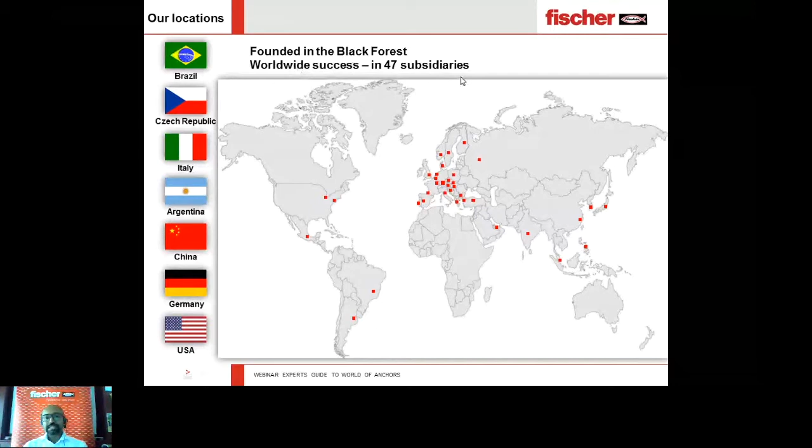And then we have different divisions. fischer innovative solutions of Fixing Systems is where I come from, and where we operate the webinar - it's all about fixings, anchors, supports, and so on. We also have a different division, which some of you might not be aware of: we are pioneers in the automotive industry as well, manufacturing main internal components for major automobile brands like Bentley, BMW, Mercedes, and so on.

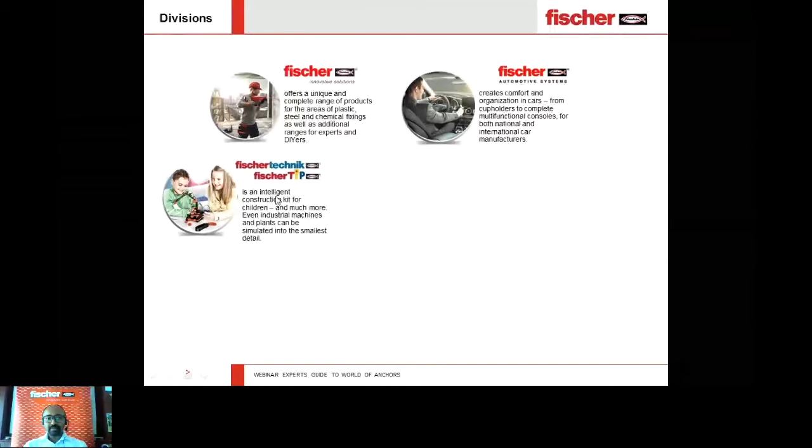Also, we have a very interesting division called fischertechnik. I personally love this division because these are smart, innovative toys for kids. And then fischer believes in lean process management by cutting down waste to operate more efficiently. So fischer has an in-house consulting division called fischer Consulting. We also acquired an automation division, which is basically into touch screens, capacitors, LCD screens and so on, which is also part of our world.

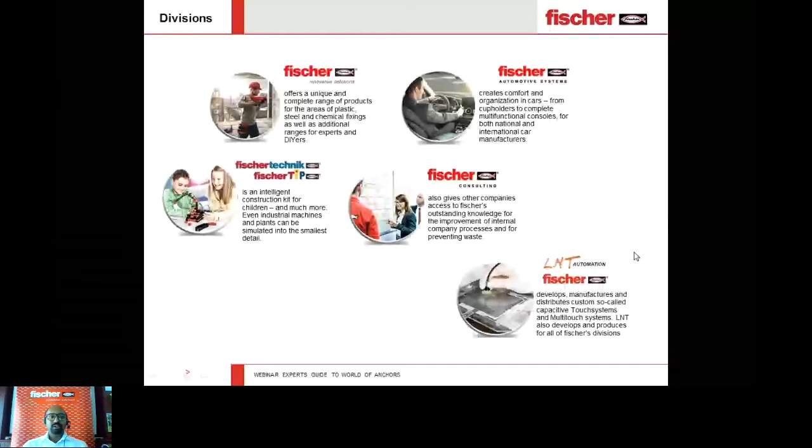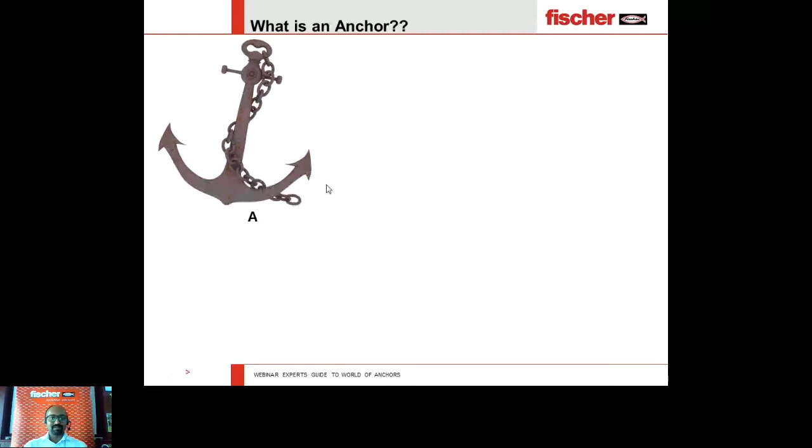Okay, now you want to be an expert in the field of anchors - that's why you attend the webinar, I guess. So let me ask, what is an anchor in your understanding? What do you think is an anchor? Let me give you some options - is it option A or is it option B?

What, in your opinion, is an anchor? Option A or option B? Okay, so you feel it's option A. Good. Okay, some of you say it's option B.

Okay, very good. Thank you, Mr. Michael. Thank you, Mohammed. Thank you, Hani, for being active participants. Some of you said A, some said B, some said both. So all of you are right. Both of these are anchors.

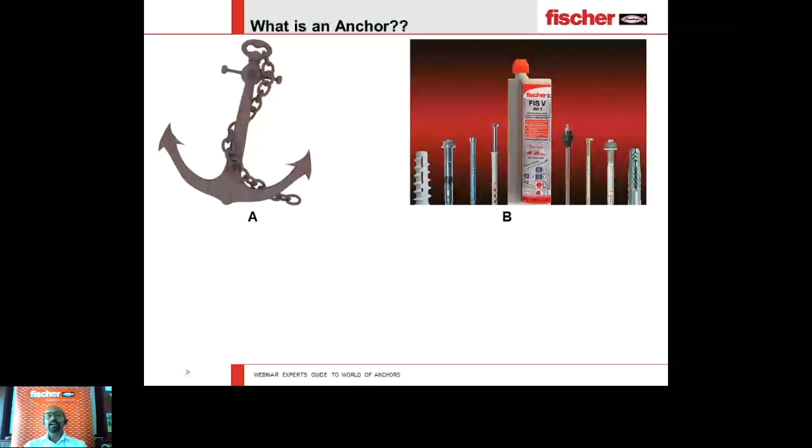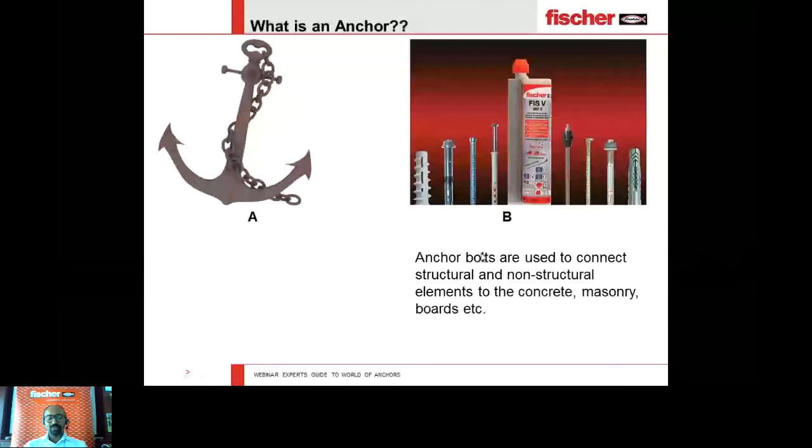One is used to anchor a ship, the other to fix something on concrete. So as you guessed, we are going to limit ourselves to option B. Option B means anchor bolts, which are used mainly to connect structural and non-structural elements to concrete, masonry, boards, etc. Thank you very much for being the sport, for actively participating.

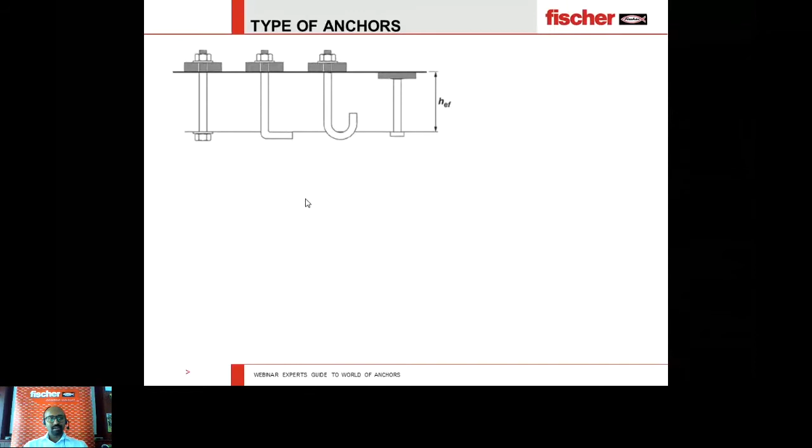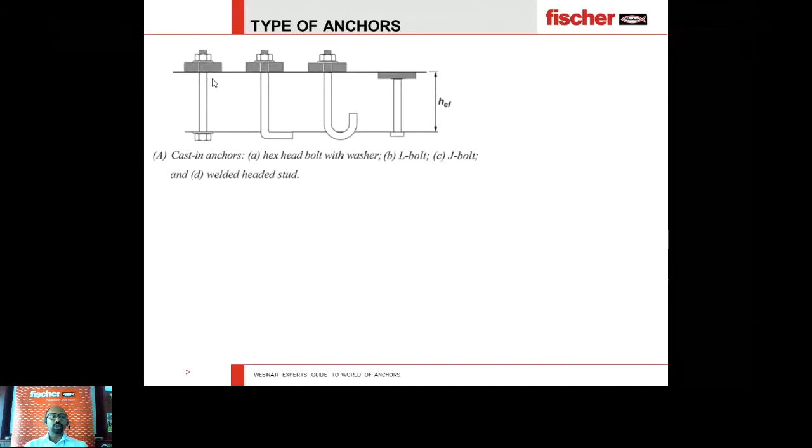Okay, it is popularly known as cast-in anchors, which are mainly cast before pouring of concrete, and then you have to wait for the concrete to completely cure before applying the load.

And then there is another type of anchor called anchor channels, wherein a channel with a bolt is embedded before casting of concrete, and then with the help of a T-bolt, your base plate is getting fixed.

And then the latest innovation in fixings are post-installed anchors, wherein you have to wait for the concrete to completely cure. You can drill a hole wherever you want and fix a post-installed anchor, which can take superior load, almost the same as the previous methods.

Now, what in your knowledge or experience does fischer supply? Is it cast-in anchors? Is it cast-in channels? Or is it post-installed anchors? What is your feeling? What is your understanding?

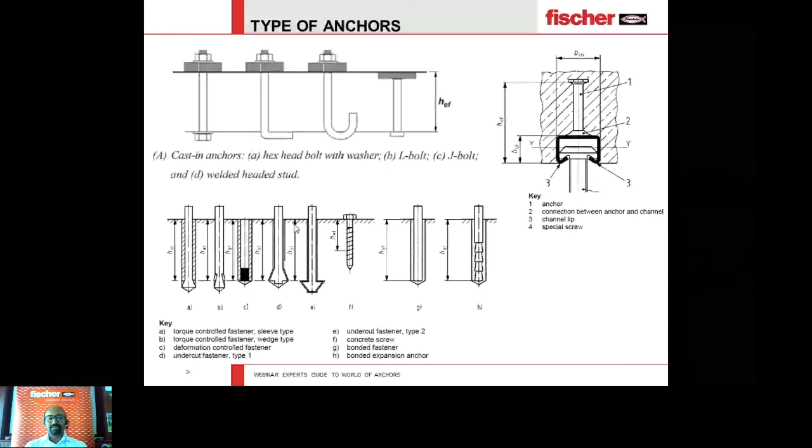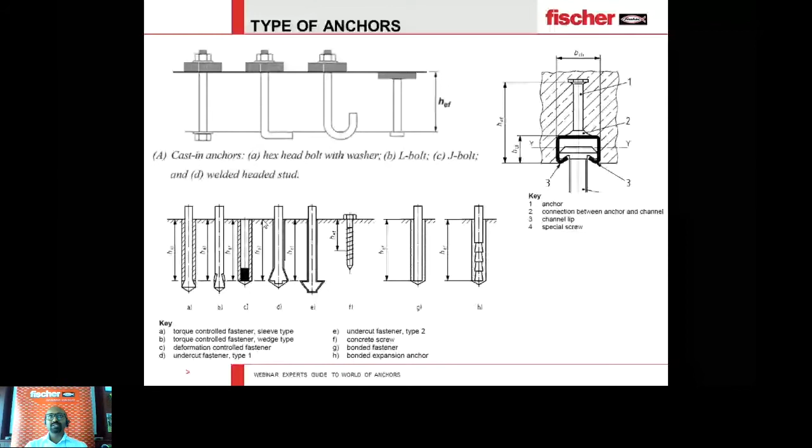Okay, nice. Post-installed, post-installed. So most of you believe it is post-installed anchors.

You're absolutely right. But just to inform you, right now we have cast-in channels as well added to our range. And of course, we are pioneers in post-install anchors. Thank you very much for actively participating again.

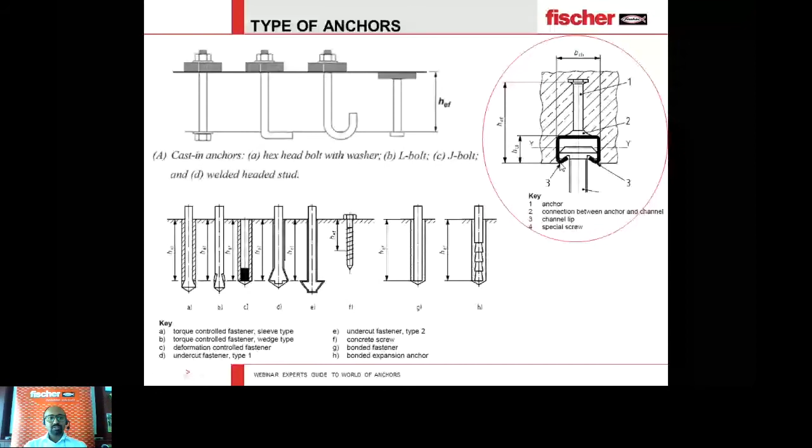So in post-install anchors, there are only three types of anchors. One is expansion anchors, wherein the anchor expands, putting some friction between the anchor itself and the concrete, as you can see here. There are different types. We have countless anchors in this mechanism.

Then you have a second type called resin bonding anchors, also known by different names in different locations, but popularly it is resin anchors or chemical anchors, which is the more common name. Here we use a magic solution called chemical anchor to form a bond. It is the same as the gluing principle. It glues between the rod and the concrete. So this is one method.

The third method, any guess? What could be the third method which we use for anchoring? Okay, let me introduce it. It is called undercut anchors.

Undercut anchors also use the same method of drilling like expansion anchors, but as you can see in the top picture, you make a bigger hole towards the end of the hole. So here it is locking. The anchor cannot come out because it is locking. So it is also known as the locking principle.

Right, okay Mr. Imad, let me go back. He says it is with sleeve. Okay, sleeve anchors also work on the expansion principle. There are some sleeve anchors which work on the undercut principle as well, as you can see. So yes, you're right, partially.

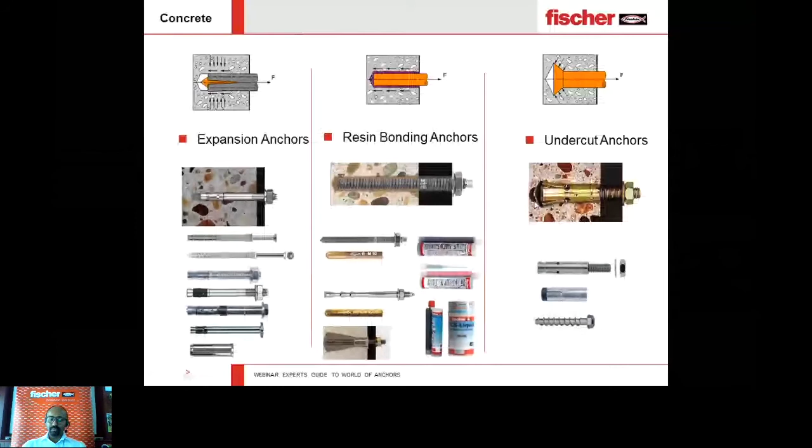Now here's a fun quiz. Who founded the first nylon plug? I'm sure you have seen this in construction sites, or at least you have used it in your home to fix some curtain or photo frames. So who do you think is the first inventor of such a product? Any idea?

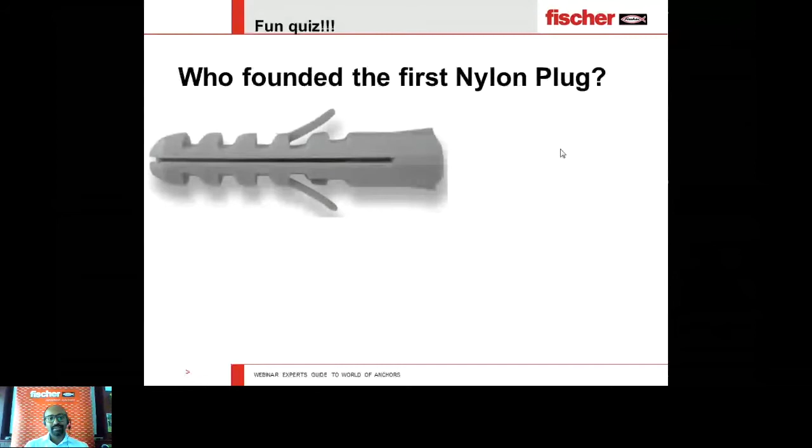Okay, nice. You're right. Professor Arthur Fischer is the inventor of the nylon plug. Imad Al Sahi, you're the first to answer it. Thank you very much. So he invented this product, which is why it is popularly known everywhere in the market as the Fischer plug.

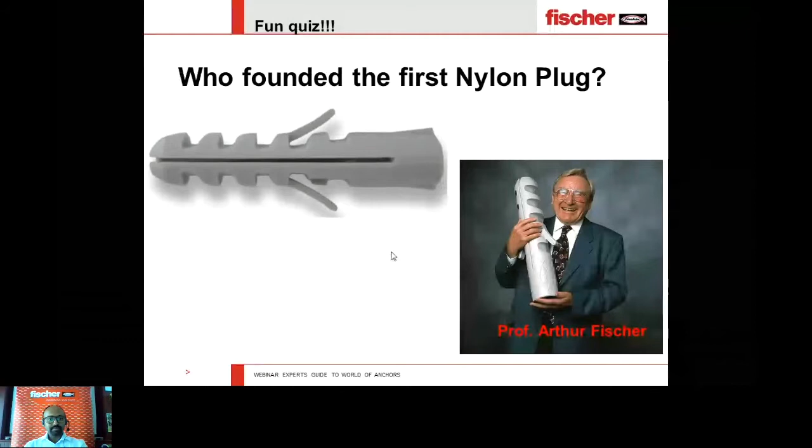Okay, now there are main factors affecting anchor performance, which is very important for you to understand. The first factor is the base material. Where are you going to install your anchor? Is it a concrete wall? Is it a masonry wall? Is it a gypsum board? And so on. Also, what is the drill method which is supposed to be used?

If you don't know the drill method, you can use the wrong drill method, which affects the anchor capacity. Very important. And then load direction: do you have tension, do you have shear, do you have a combination, do you have moment, and so on.

And then load type - do you have a static load, seismic load, dynamic load, etc.? And third, how is your arrangement of anchors? Do you have 2 anchors, 3 anchors, 5 anchors? What is the spacing between them? Do you have an edge distance? And so on. Don't worry, we will go into each one of these aspects and let's learn together.

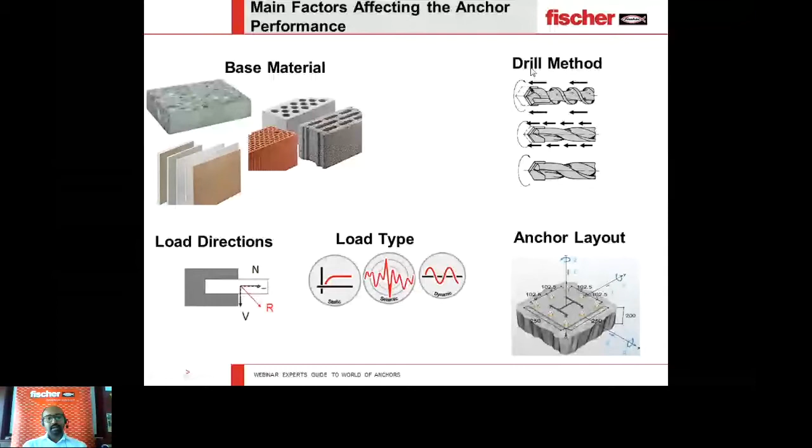First thing in anchor selection, mainly we have 3 main base materials: concrete, masonry, and board elements. Based on our experience in construction sites, mostly fixings are in concrete, around 60% of fixings go to concrete. There is around 25 to 30% in masonry, and then around 15 to 20% in board elements. So let's go one by one.

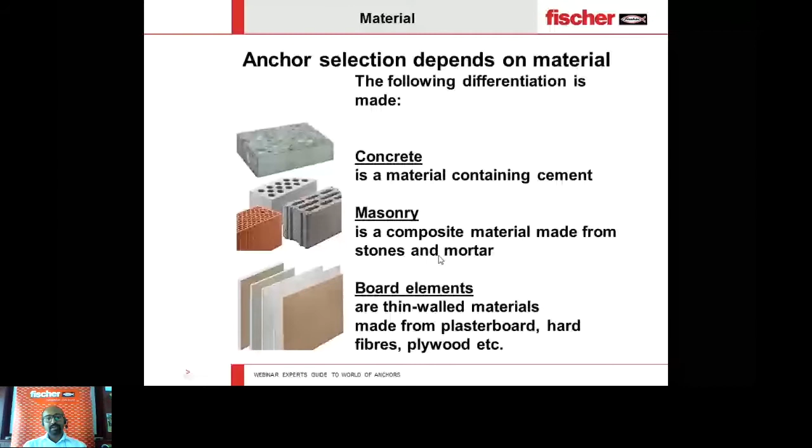In concrete, you have normal concrete, which is used in RCC structures everywhere. There is also lightweight concrete, which is used mainly for non-structural elements like lintel beams or partitions.

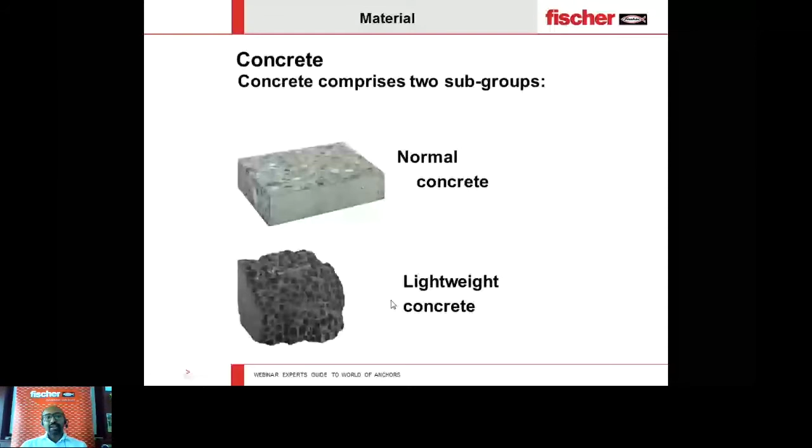And we cannot go through concrete without using the term cracked concrete. Any idea what is cracked concrete? I'm sure you're an expert, so you would definitely know what is cracked concrete.

Okay good. So when we say cracked concrete, we are referring to concrete which is subject to tension. As we know, concrete is very good in compression, but it is weak in tension - it has only 10% of its compressive capacity in tension. Thank you, Mr. Imad Al Salahi, yes you are very well right. Whenever you have concrete under tension, the tension side of concrete is termed as cracked concrete.

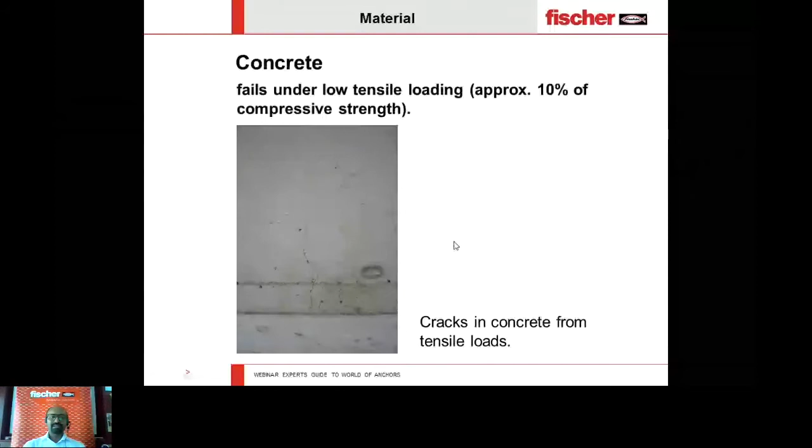To make it more simple, let's watch a video. Here we have a video where you have a ball. Can you see the video? Don't worry if you only see a picture, because I've not played the video yet. You have a ball which represents a load, and then you have a concrete structure. Let me play the video and see what is the effect of the ball moving on top of the structure. Let me play it once again.

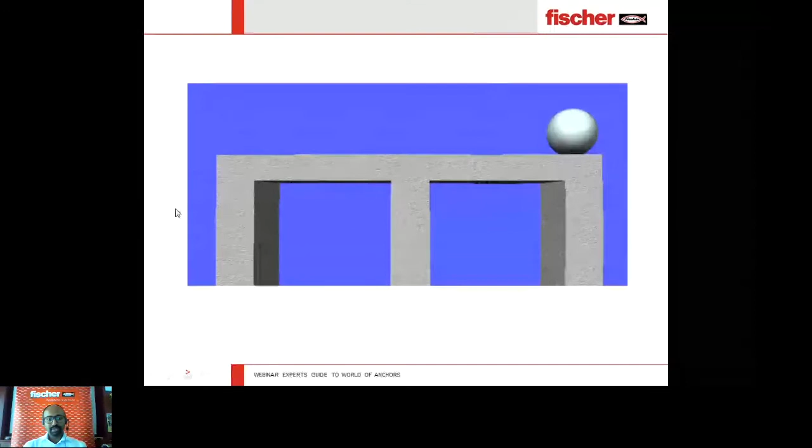So whenever you have tension acting on concrete, we call it by the term cracked concrete, and it is very important that you choose fixings approved for cracked concrete. If you choose a wrong fixing in cracked concrete, it can be a fatal accident because you would result in up to 80% capacity loss of anchors if you use an anchor which is not approved for cracked concrete at this particular location.

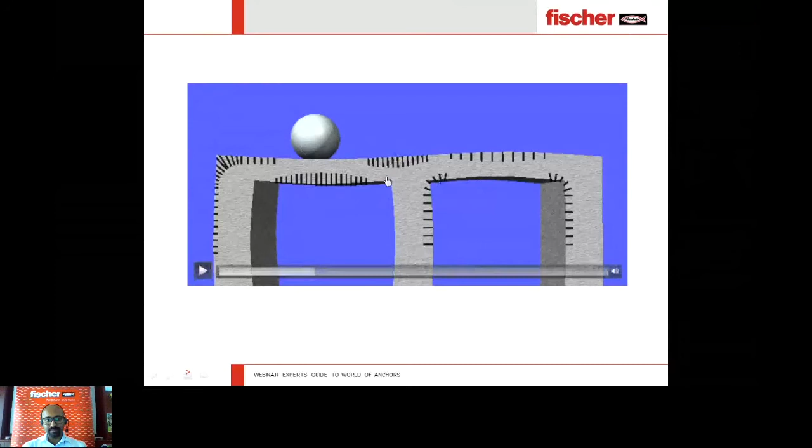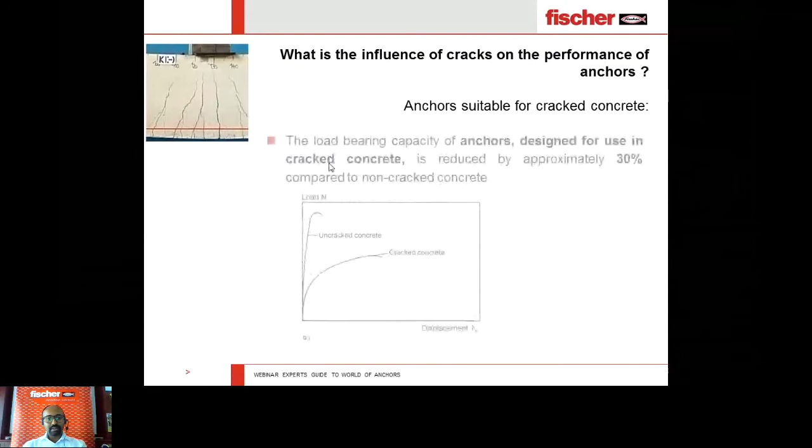So let's say if you have an anchor approved for use in cracked concrete, and you're using it in non-cracked concrete, there is a difference of around 30%. I'm repeating - this is a comparison when you have an anchor approved for both cracked and non-cracked. If you use this anchor in uncracked concrete, let's say you get a capacity of 10 kilonewton. Same anchor, you use it in cracked concrete, you would result in a capacity of only 7 to 8 kilonewton. So around 30% reduction is possible when you consider cracked concrete in your designs.

If you use, by mistake, an anchor approved only for uncracked concrete in cracked concrete, the difference is not 30%, it would drop up to 80%. This is again an important point I would like to highlight: never use a non-approved anchor in cracked concrete. Very important - this is a safety risk. It could be a threat to life or to property. Either way, please make sure you use only approved fixings for cracked concrete.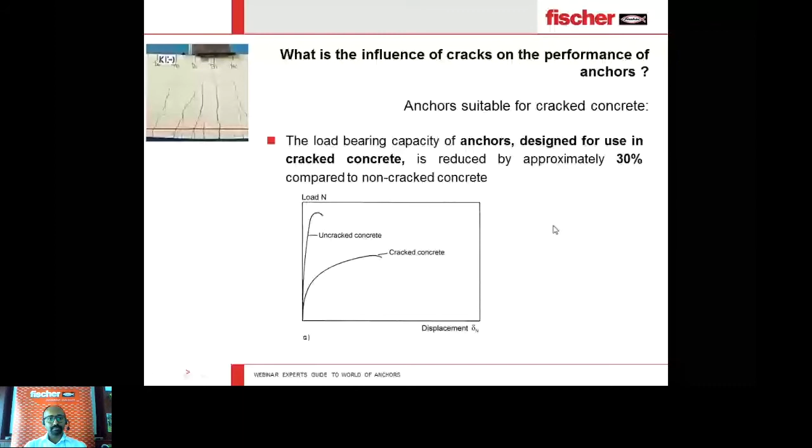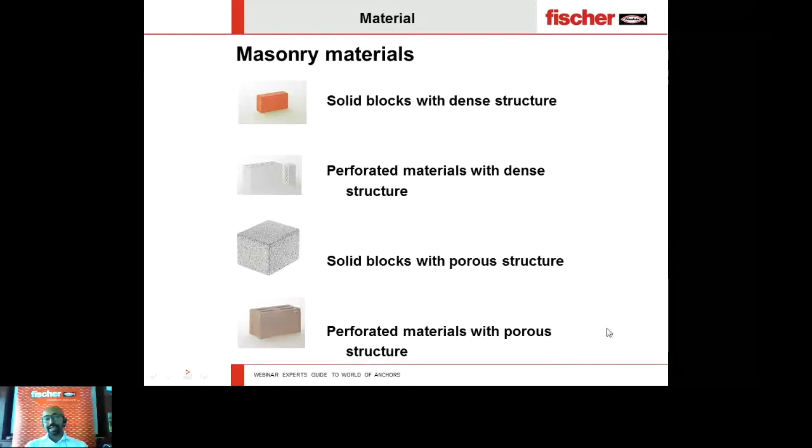And that was about concrete. Now the second most important base material is masonry. In masonry, you can see different elements like solid bricks or solid concrete blocks. You have also perforated materials like hollow blocks, and solid blocks with porous structure. This is also very popular in the Middle East because of high temperature and more energy saving. It is called aerated blocks or AAC blocks, which is also very popular in the market at the moment.

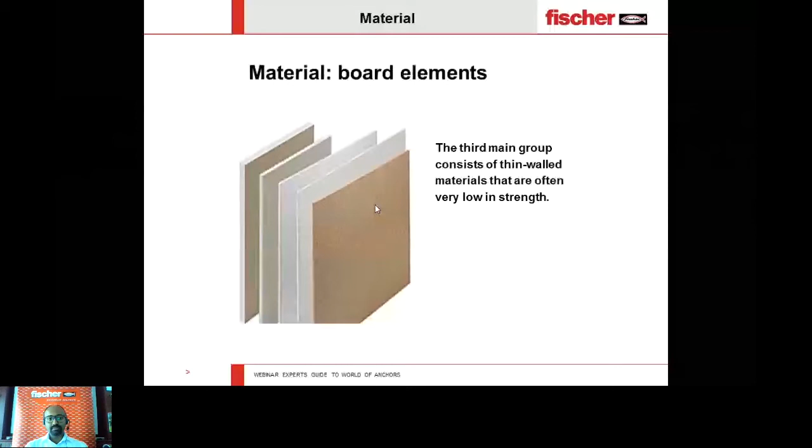Also, the last base material type is called board elements, also called thin walled materials, which is primarily used for partitions, ceilings, etc. Examples are gypsum boards, ply boards, cement boards, etc. The trick to fixing in a thin walled material is to use the locking principle, because friction or chemical anchor possibly is not an option.

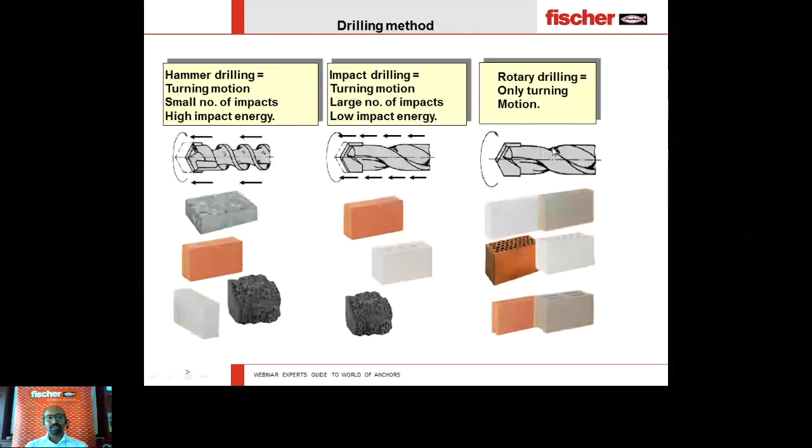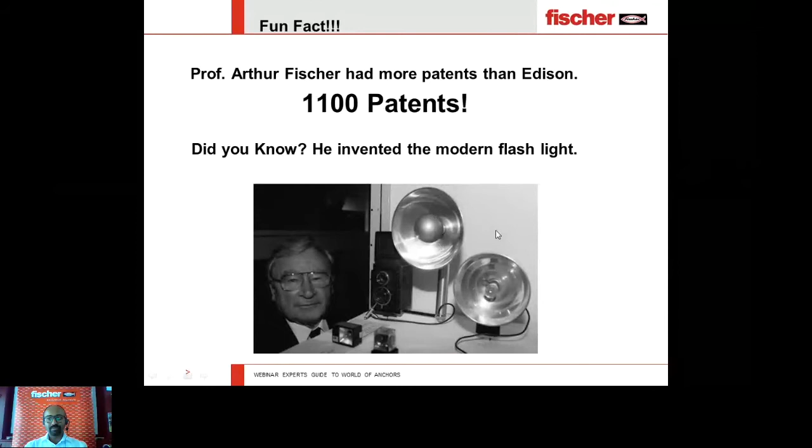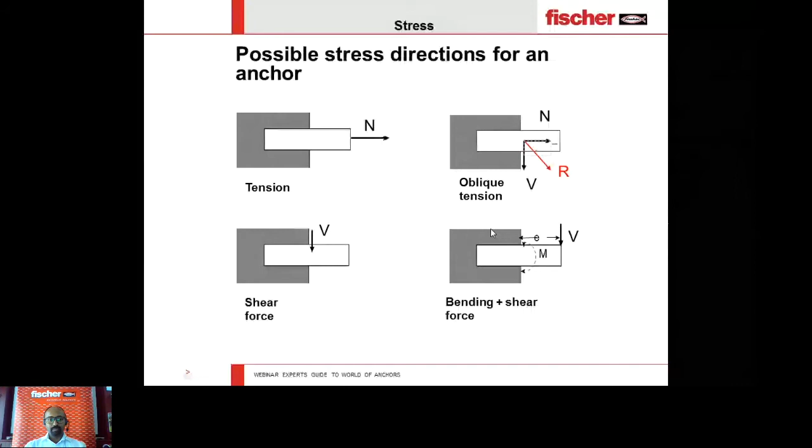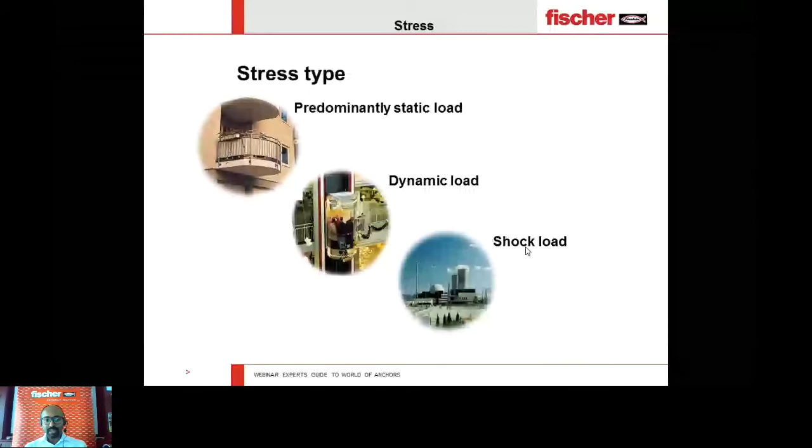Shock loads are loads which act at a very high magnitude for a very small period of time. Examples of shock load would be seismic activity or an earthquake, a bomb blast, a fire accident, and so on. You don't anticipate this load to be active throughout the lifetime of the building, but maybe there's a huge load acting for a few minutes and then it goes back. So this is called shock load.

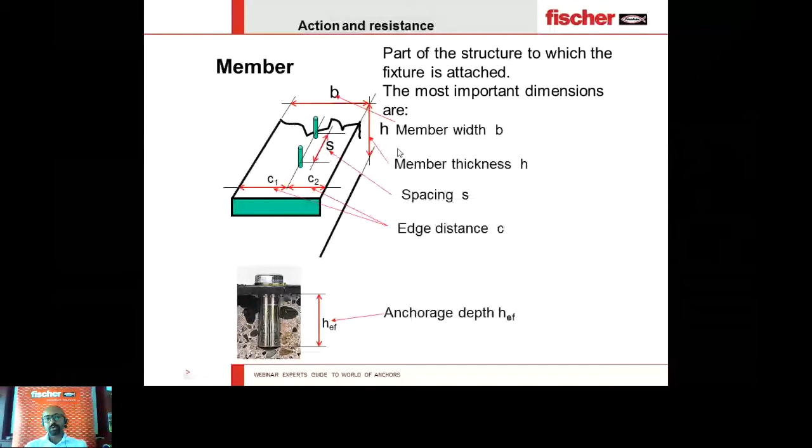To understand an anchor and its resistance, it is very important to know the arrangement of anchors. For example, in this case I have two anchors, so it's very important that we know the spacing between the anchors and the distance from the anchor to the edge of concrete. It's also important to know the member thickness - for example, are you fixing on top of a slab, and what is the slab thickness? Is it 100mm, 200mm, 300mm or more? This is very important and could affect the anchor performance, because with more depth, maybe we can have more embedment depth.

If you have less depth, you have to select an anchor with shallow embedment depth, and so on. Also, the more deeper you go, it has an influence on the concrete capacity, which we would also cover in the coming slides.

Now, from here on, we have a term called S, which is denoting the spacing between two anchors, center to center spacing. Then C is used for edge distance, from the center of the anchor to the edge of concrete. And remember this term, it's called H effective. It is the embedment depth of the anchor, the depth from which the anchor starts taking the load. These parameters are very important when we go further down into calculations and so on.

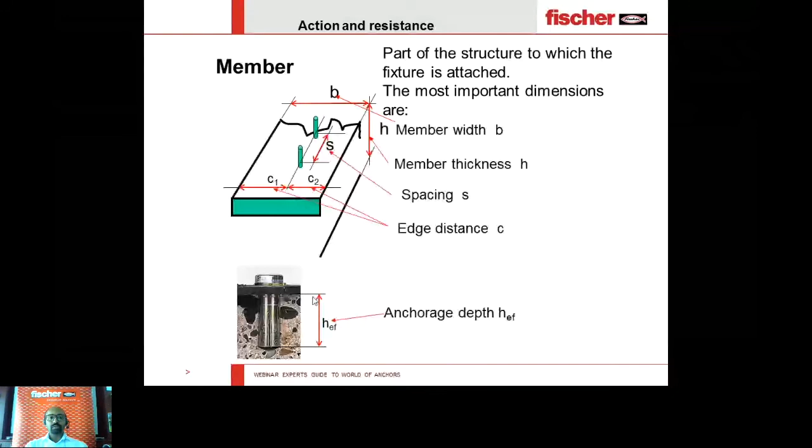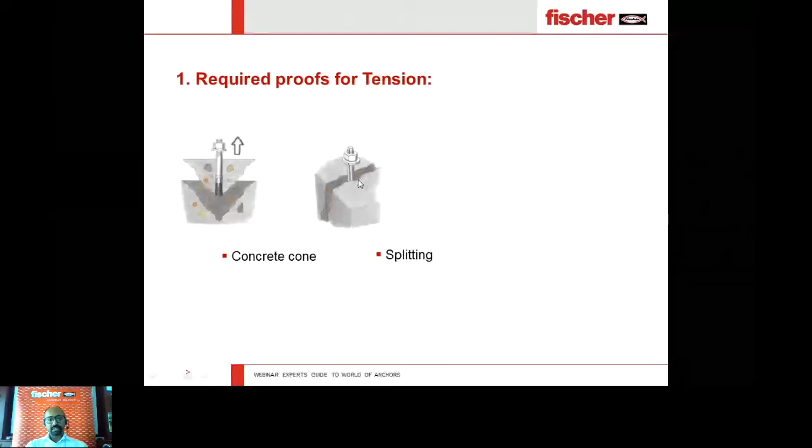So to prove any anchor is safe or unsafe, we have to do a couple of checks. Let's go one by one on proof for tension. Here we have to check if the concrete itself is strong enough to take the load, which is normally called concrete cone failure. We also have splitting failure—we need to know that based on this load, the concrete does not crack or split. We have to know if the anchor body, which is normally made of steel, can take this load or it would break. And then we need to check, are we applying more load than the anchor mechanism is designed for, right?

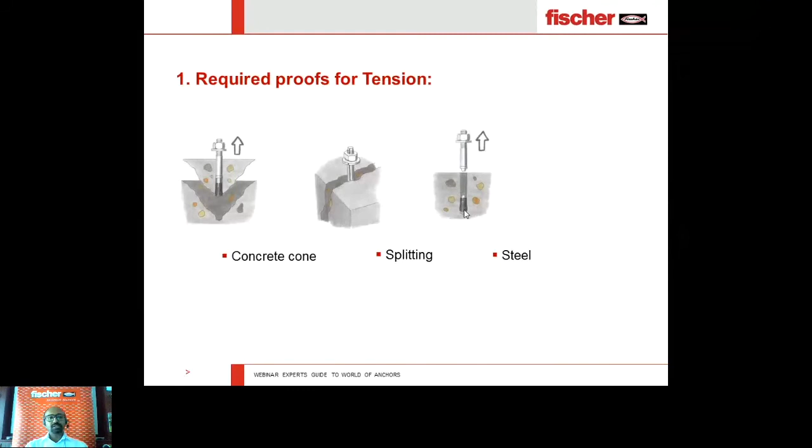So let's go to the first failure mode, which is concrete cone capacity. When the anchor is subjected to a tensile force, it distributes the load inside concrete in a cone shape, as you can see. The typical dimension of this cone is a radius of 1.5 times embedment depth. So when you have two anchors, the spacing between them has to be 3 times the embedment depth. Is it clear?

Okay, let's take an example. Imagine you have an anchor with an embedment depth of 100 mm. What shall be the spacing between two anchors so that you can get maximum concrete capacity? 100 mm embedment depth, what shall be the spacing?

Mohammed has replied 300. Yes, you're absolutely right, 300 mm. I'm sure you are catching the points very well. But do you think 300 mm spacing is always possible at site? Do you think there will be limitations? Absolutely, you're right, there will be a lot of limitations, and you possibly cannot always go with 300 mm or 3 times embedment depth at site. I agree and I understand 100%.

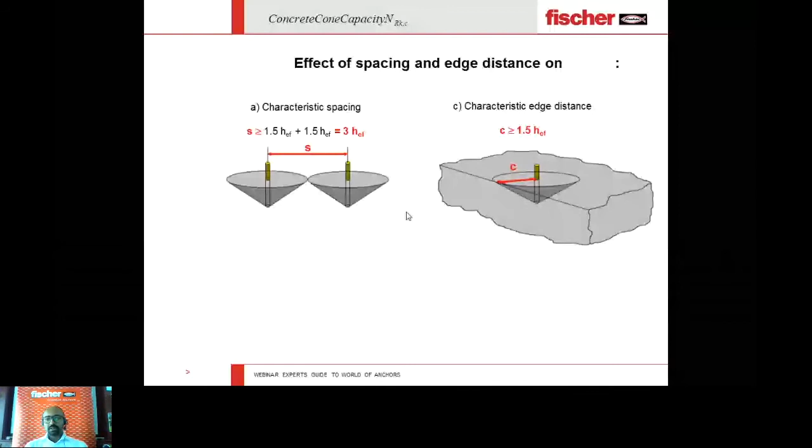So you would have a condition like this where the cones are overlapping. What we do is, when we have this overlap, you have to reduce the capacity of anchors. Let's say the cone capacity of one anchor is 10 kilonewton. When you have two anchors with less than 300 mm spacing, you would not have 20 kilonewton capacity, maybe less. This we have to calculate, and then we can judge if it is safe or not safe. But what happens normally in offices is that they take the capacity from the catalog for one anchor, and whatever the spacing, they multiply it by the number of anchors, which is absolutely wrong.

So it is a safety factor, safety relevant aspect. Please make sure that if you are reducing more than 3 times the embedment depth, you have to cross check the initial value of the characteristic resistance. Now to make it simple, I won't go through the calculation of how to calculate the total concrete capacity when you have 10 anchors. No, let's keep it simple.

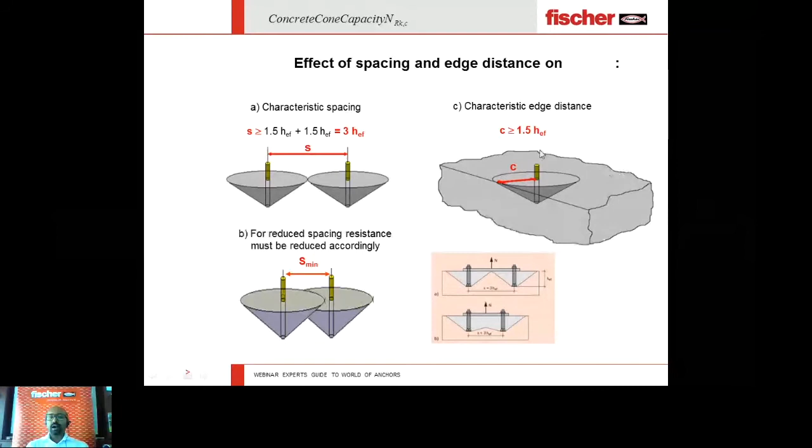Let's calculate how to know the capacity of concrete when you have one single anchor in a big slab. Let's take an example. Here you have an anchor embedded at HEF. You know the dimensions of the cone, the radius is 1.5 times HEF. The formula to calculate the single anchor concrete cone capacity is K1 multiplied by the square root of the cube strength of concrete, then multiplied with embedment depth to the power of 1.5.

K1 is 7.2 if you have cracked concrete and 10.1 if you have non-cracked concrete. If you recall my previous slide, I said that you have a drop of 30% from non-cracked to cracked concrete. Now, can you see where this 30% is coming from? From 7.2 to 10.1, there is around 30% gap. So this is why we always say in cracked concrete, you have a reduction of 30% capacity. Is it clear how to calculate the capacity of concrete cone for a single anchor?

So it's K1, which depends on cracked or non-cracked concrete, and these are the values. Then cube strength of concrete is your compressive strength of concrete. And then HEF is the embedment depth to the power of 1.5.

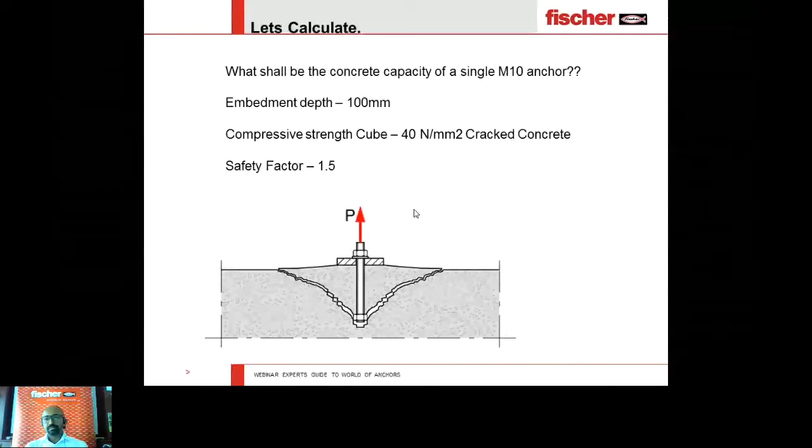Okay, no problem, Mr. John. Here's the formula. We have cube strength of 40, embedment depth of 100 mm, and it is cracked concrete. So you know every factor in this formula. You just need to put it in this expression and you would get a result. And please, this is the characteristic value, which means it is the actual failure value. You have to use a safety factor of 1.5 from this.

Okay Mr. Imad, I'm really impressed. Quickly you found out, you came up with the answer. It is around 30.4, or precisely 30.3 something, as you rightly said. Thank you very much for trying and working parallelly at the same time.

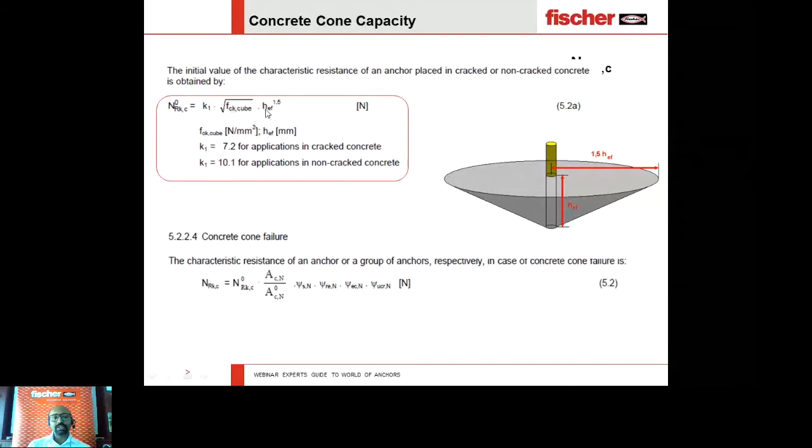Now we would know how to calculate the pull-out capacity of anchors. I'm sure you know how to calculate the steel capacity, because it is just the grade of steel, which is the yield stress of steel multiplied by area, very simple. But when you have pull-out capacity, you have two scenarios: either a mechanical anchor or an expansion bolt. Then it's pretty simple - you can take the pullout value directly from the approval document. In ACI, ICC document or European Technical Approval document, you would find directly the pullout value.

So let's take an example of an M8 anchor with an embedment depth of 45 mm. In the approval, it would be directly mentioned as 4.6 kilonewton. So it's pretty straightforward - you have to divide this 4.6 with the safety factor mentioned in the approval. So let's say if you have 4.6 and the safety factor mentioned is 1.5, then 4.6 divided by 1.5, you would get something like 3.07 kilonewton.

When you have a chemical anchor, it gets a little more tedious - you have to calculate the capacity. So still, if you open the ETA approval of the chemical anchor, you would see a factor called the bond strength, normally given by the denomination of tau. Let's take an example - a 12 mm anchor, the bond strength or tau value is 15. We take this value and substitute in this formula: pi into d, which is diameter, multiplied by embedment depth - how deep is your anchor embedded - multiplied by the bond strength. So what you get from the ETA approval is normally the bond strength.

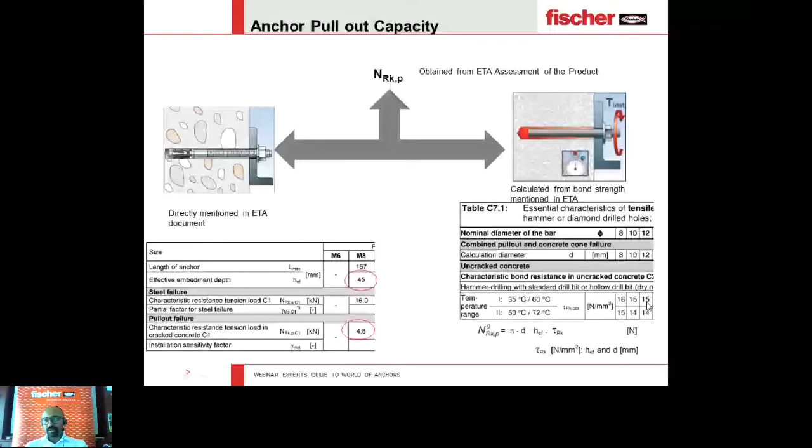Okay, great. Now, before I start with the example - normally in the approval document, the capacity mentioned would be for C20/25 grade of concrete. If you have a stronger grade of concrete, there is an increase factor which is also mentioned in the ETA approval document. In this example, I want to calculate the pull-out capacity of an M10 threaded rod installed using Fischer FIS EM Plus at an embedment depth of 100 mm.

So now we have this - this is the bond strength. So we are considering temperature range 1, and in temperature range 1, we have a bond strength of 15. The formula is given here. Can you calculate and tell me what is the capacity in terms of pullout? The embedment depth is 100 mm.

Great, thank you Mr. Sagar and Mr. Singh for participating. Yes, it is right - it is 47.1 kilonewton. Again, this is a failure load, which means at this load the anchor will come out. You have to apply a safety factor, which is also published in the ETA. Now, as you rightly said, the failure capacity in pullout is 47.1. Let's say this particular anchor has got a safety factor of 1.5. What is the design pullout capacity?

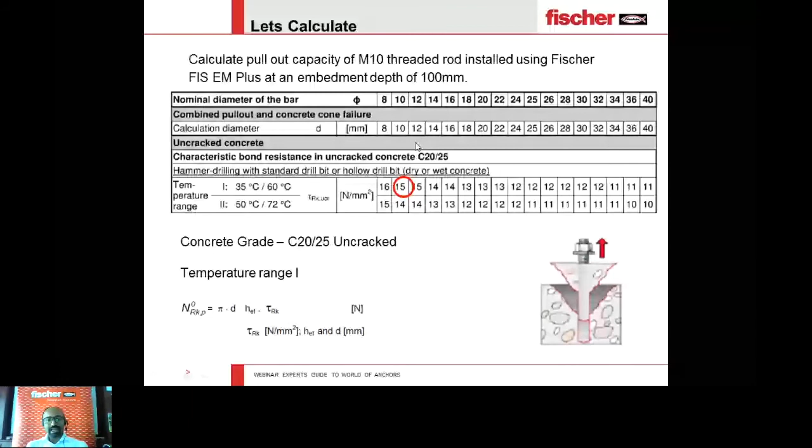Great, Mr. Imad, you're a genius. Yes, it is around 31.4. Mr. Singh, thank you very much. Right, no problem, thank you. Thank you for being actively participating in these formulas and calculations.

That was about tension. In shear also you have to do certain checks. So in shear, again you have steel failure, you have pry-out failure, and you have edge failure. So here in steel failure, normally it is directly half of tensile steel capacity.

Here is an important thing. When you have shear load with lever arm, which means your base plate is away from the concrete, it has grout or there is an offset, then you have to calculate the lever arm capacity of the anchor. The MRKS value is given in the ETA approval, and length is the offset distance plus half diameter. This is simple, it is just to calculate steel failure.

So from our previous exercise, we know that the concrete capacity is 30 kilonewton. What shall be the shear capacity? Imagining it is crack concrete.

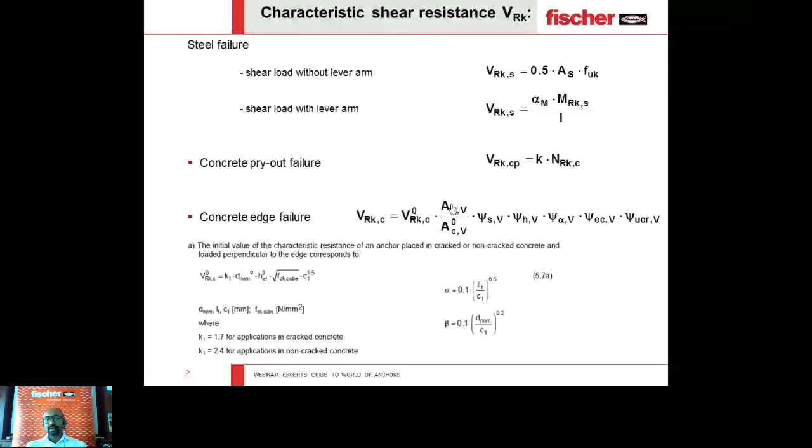In terms of tension, the area is calculated from the top because we were speaking about diameter of the cone. In terms of shear load, the area is the cross-section area, which is happening here because the shear direction is perpendicular to the anchor.

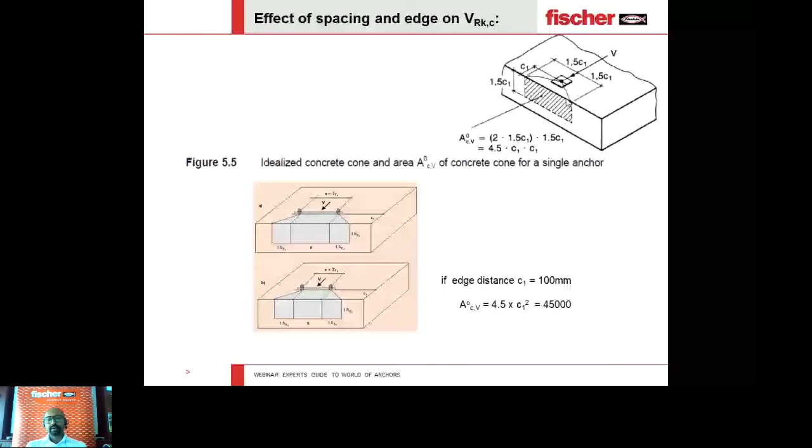So let me ask you a question. What is the advantage if I make two holes near the edge, slotted holes?

I have 4 anchors, and the base plate carrying 4 anchors is subjected to a huge shear force. So if I make 2 anchors near to the edge as slotted holes, okay, Mr. Imam had said that you can increase the edge distance. Yes, in this case, what we are doing is these 2 anchors will not take any shear load. So the shear load would be completely taken by anchors away from the edge. So here you are improving the edge distance.

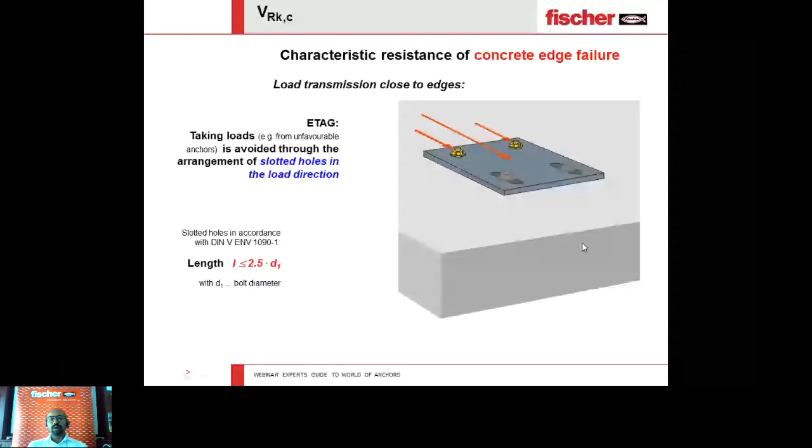Also, another tip is when you have anchors arranged parallel to the edge, you have a wider cone, whereas when you have anchors perpendicular to the edge, you have a narrow cone. Yes, Mr. Michael, thank you very much, you are also absolutely correct. You can eliminate shear load on the 2 anchors near to the edge. So is the concept of edge clear?

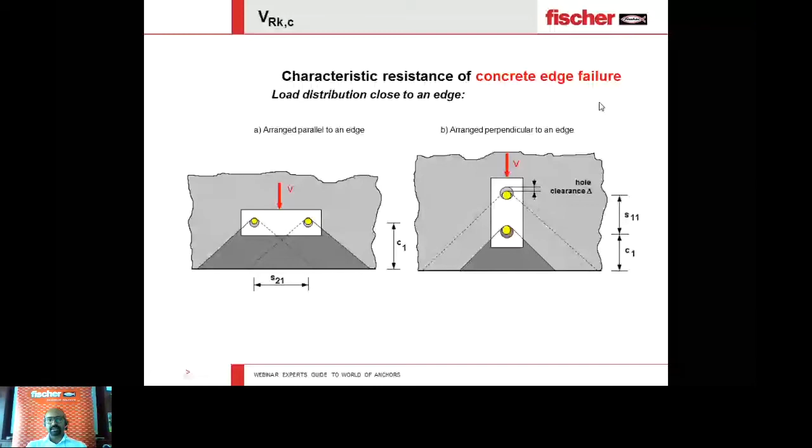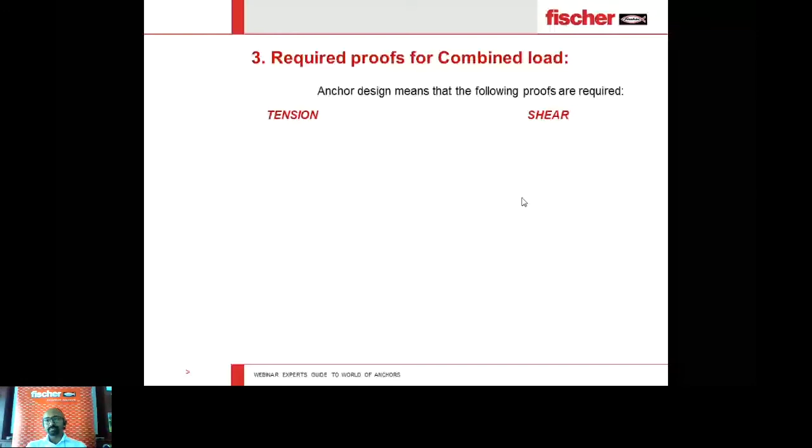Now we know how to calculate tension, we know how to calculate shear. We have to calculate a very important aspect, which is combination. So we know the tension capacity. NSD is the load and NRD is the capacity. This is the design capacity and NSD is the design load. So we divide load by capacity, we get beta N, which is the utilization in tension. Same thing we do for shear, so we divide the shear load by the shear capacity, you get utilization in shear, which is beta V.

What we need to do is we need to find combination. So we add the two combinations. It should be less than 1.2, or beta n to the power of 1.5 plus beta v to the power of 1.5 should be less than 1. Only if the tensile utilization, the shear utilization, and the combination, only if all three are passing, then you get a safe result.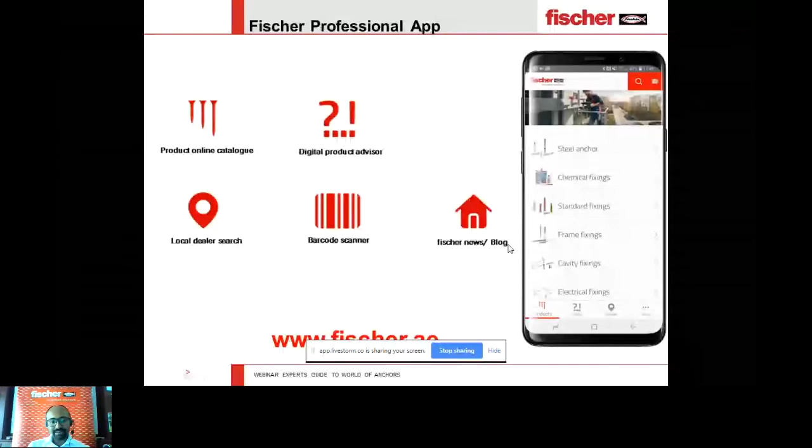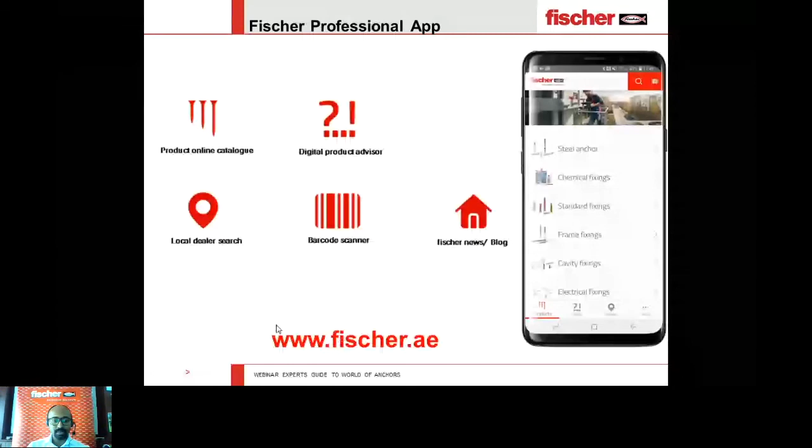You would also have fischer News, blogs on technical articles which we publish, and so on. So it is our initiative to share our knowledge, share our product information to as many customers as possible. Also, if you require any information regarding fischer products, our services, our webinars, please make it a point to visit fischer.ae, our web page, and register yourself.